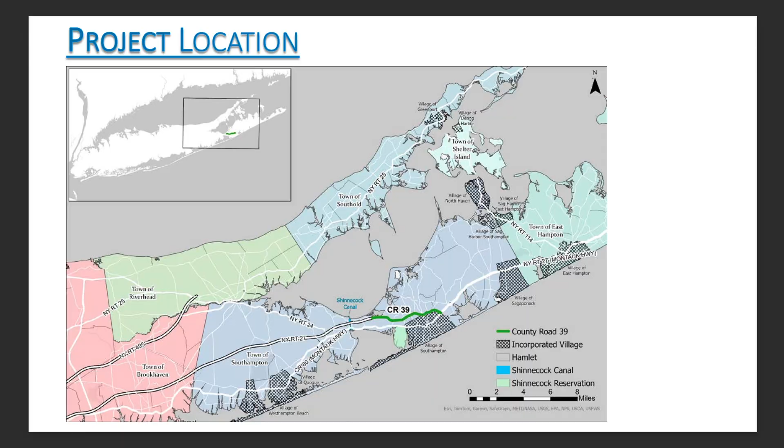So, project location, I'm sure everybody knows where County Road 39 is, just a blow up of that. Project goals, improve capacity, that's a shocker. The biggest one I think on this list is reduce congestion in downtowns. I'm sure everyone here can agree that they would like their downtowns back. And if you could eliminate congestion in the downtowns, make them more walkable, that would be a good thing. So I think that's the biggest one to take away from this. We'd love to improve the congestion in the downtowns, not just on County Road 39.

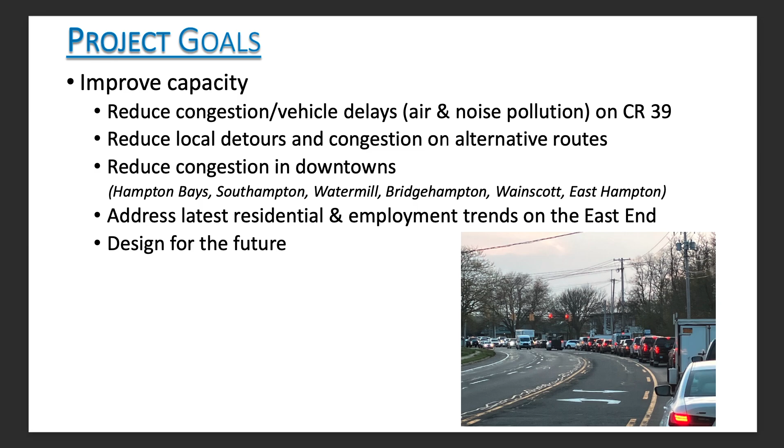Obviously, safety is a huge component, making the road standard lane widths and shoulders. That would help emergency services. Obviously, the delays impact emergency services. So a little background, and I think this is all kind of obvious stuff. We're in the very beginning stages of a planning project. So we're here to advise of some of the congestion issues, some of the magnitude of the congestion, some of the ideas that we have, but we're also here to listen. We would like your input. The more input we get from the community, the better we can tailor the project to meet the goals of the community.

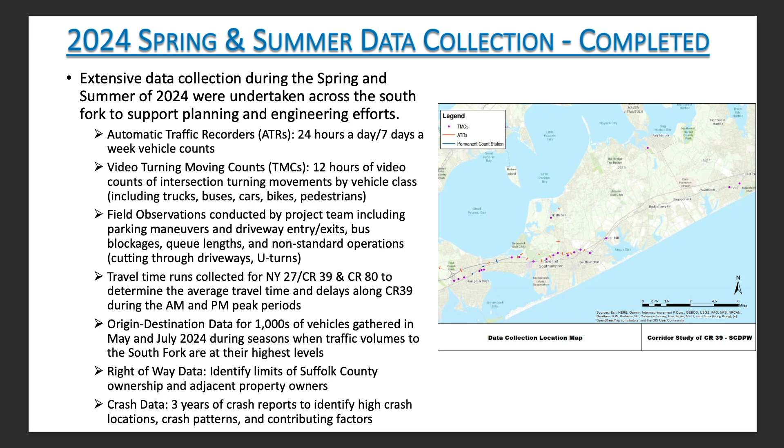Origin destination is essentially figuring out where people are going once they cross the canal. There are only 2 points to cross—Montauk Highway and Sunrise Highway—so it's perfect, textbook traffic engineering. You collect data on who's crossing the canal and where they're going, and with technology now, through Google and Google Waze, that kind of data is available to us, and it's really fantastic.

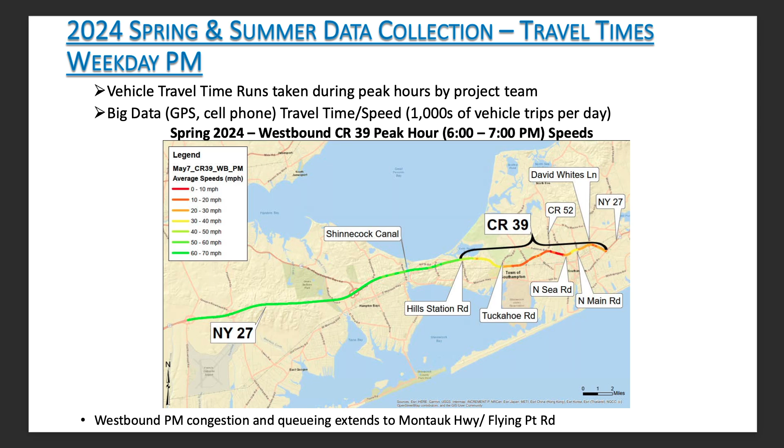In the PM it's reversed—operator error, hang on. So on County Road 39 in the PM, you have all red, and then it opens up and goes out onto Sunrise Highway.

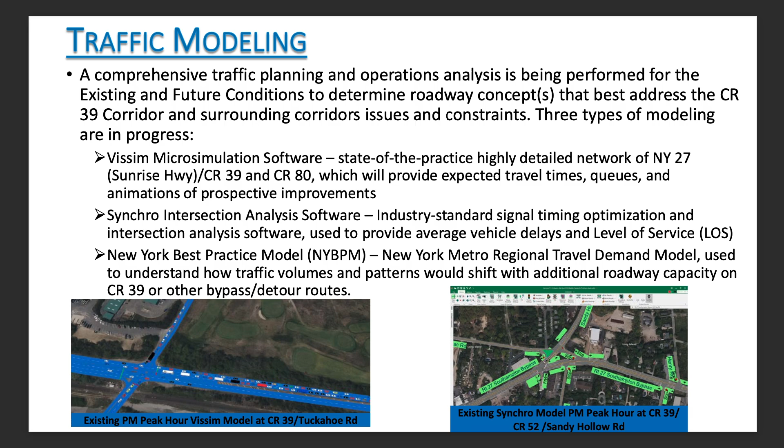First, what we do is correlate the models to existing conditions. Once the model actually looks like the existing conditions—so if there's a queue from an intersection that's 150 feet from the signal, and the model represents that same 150-foot queue—we know we got it right. So we make sure the existing condition model is correct.

And then we take it and put the proposed data in. What if we did this? What if we added a lane? What if we put a roundabout there? What if we put a bridge there? Now that we have the model correlated properly, that model can tell us what the future might look like, what the alternatives might look like.

So travel times—we've done travel time studies in 2015, 2016, and 2022. These were all conducted when the flashing operations occurred, and it was extremely interesting, which was a shock to us. Every time we got the same result: travel times increased when the traffic signals went on flash. No one believes us, but we did it three times and got the same exact result.

The first time it was interesting to us, and then we kind of realized that the cones and the flashing lights distracted people. That's what we're surmising. In the mornings particularly, there's not a lot of green time on the side streets—you've got mostly green on County Road 39—and the cones were actually distracting people, causing them to slow down.

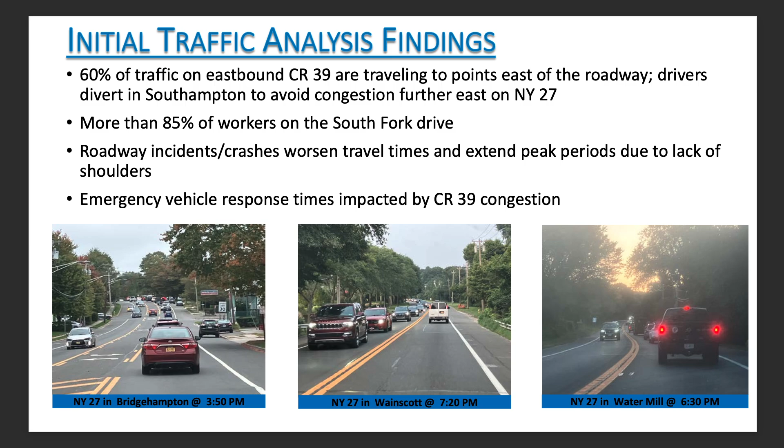Crashes worsen everything. Every time there's a crash, I don't have to tell you, it makes everything horrible. You get a crash and can't move anywhere. Obviously, emergency service is affected.

In 1984, New York State DOT did a South Fork transportation study. In 1986, the East End Transportation Council came into being, and they did a sustainable East End development called SEED. In 1999, Southampton Town did another comprehensive plan. In 2000, a transportation advisory task force was created. In 2001, there was a Southampton intermodal transportation study. In 2005, a presentation was given to the Regional Transportation Summit. In 2009, there was a follow-up on public transportation.

So from 1969, when the problem was identified, to 2008, they studied it. Nothing was done. In 2008, Suffolk County widened - we had our first widening project, and then in 2013, we had our second widening project. So in 2024, here we stand. What are we going to do? We're going to study it. We're going to fix it.

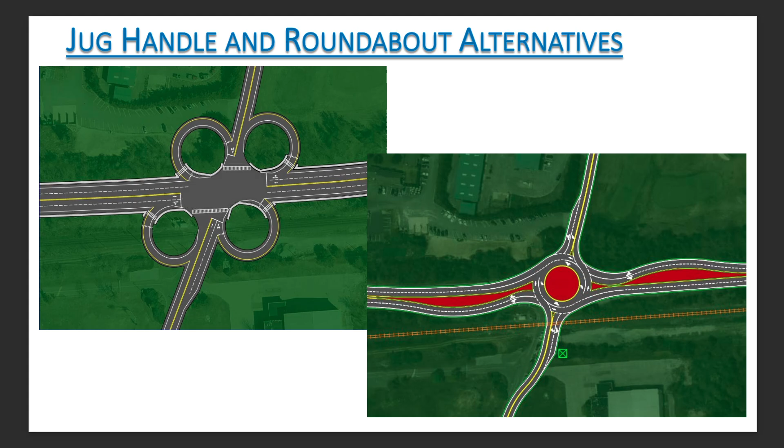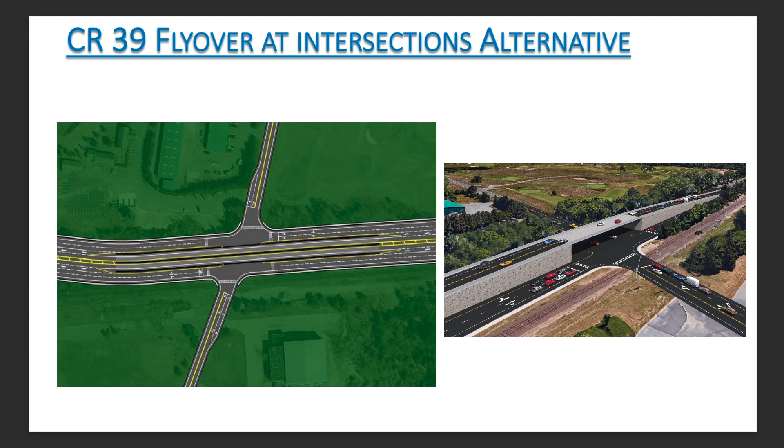So again, jug handles, roundabouts with 3 lanes, these kind of solutions, really not gonna work. Flyovers, side street flyovers, that's what this is, a side street flyover. This could be part of the solution, but it's not gonna be on its own a solution. Again, a different type of flyover on County Road 39. So here's County Road 39 flying over this intersection, so there would be a bridge. This is a rendering of that.

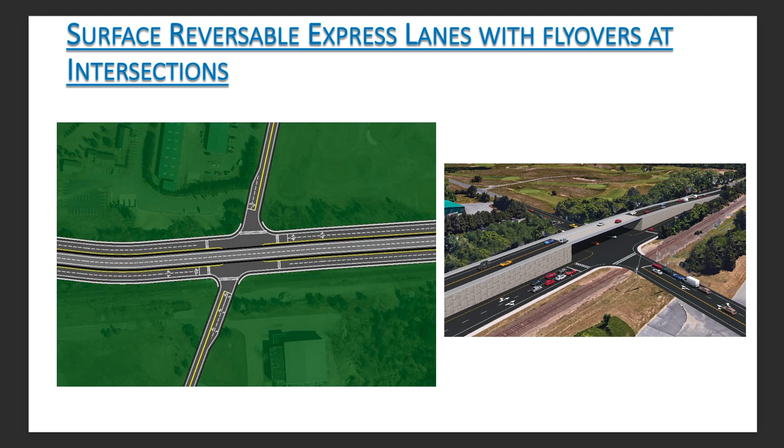So we have reversible lanes. The previous one was an express lane, essentially. This would become some sort of express lane. Now this is a concept where it's reversible. So you would make this eastbound in the AM and westbound in the PM. But again, you have a flyover. I agree with the position that it doesn't fit with the character of the community. There's no bridges like that on the South Fork. 100% agree. But it still doesn't discount the fact that you need this. It's the only thing that's going to help you.

So, love this one. My commissioner loves this one. Elevated express lane. So if we were to widen County Road 39, we're going to have to do massive property acquisitions and change the character of the community in a big way. Probably put some businesses out of business because they'd be too close to the new roadway. So there would be huge changes there.

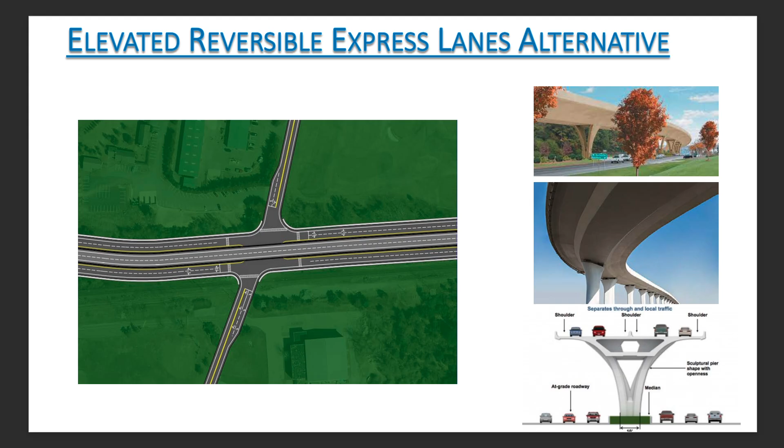This would lessen that. So if you essentially ran an elevated roadway down the center, you could lessen the property acquisition, lessen the impact to those businesses. Now I'm not envisioning 4 lanes. We just pulled this off the internet to give you an idea of what we're talking about. It would probably be something smaller than that. And that is definitely not in the character of the community. But it's a solution that would work. And it's hundreds and hundreds of millions of dollars.

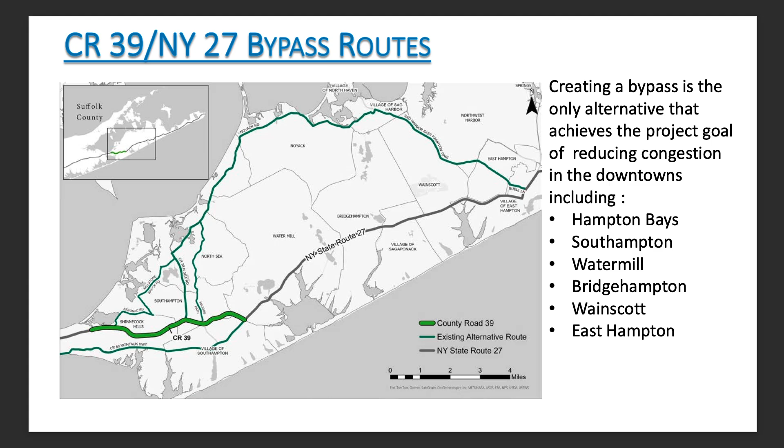Bypass routes. So, we have a lot of downtowns that are affected right now. Hampton Bays, Southampton, Watermill, Bridgehampton, Wainscott, East Hampton. I'm sure you guys could even name more. You have one roadway, and it runs right through those downtowns. The only way to get those downtowns back is to do a bypass road of some sort, somewhere.

Where that is, again, we need input from the community. We need the community to come to a consensus. You're not going to agree 100% where it should be. We don't expect that. But we need to get some sort of consensus on where that alternative route may be best placed. And then we can maybe build it. So here's some ideas.

There's existing alternative routes right now, which is Shrubland to Noyack, okay? Maybe that is improved. Maybe there's some other roadway that is constructed in the center of this fork, okay? There's what is that, magenta? No, that's not magenta. What color is that? Teal, that's the color, thank you.

So 39 to 52, and then there's a LIPA right-of-way that we might be able to take advantage of. And then you have the Long Island Railroad right-of-way, which is the purple. So, there are options for alternative roadways. However, we need to get to those start points. Say the LIPA right-of-way is the one that's selected. We have to get to this point of the LIPA right-of-way. So we have to improve County Road 39 and 52 potentially to get to that point. And then there'd be an alternative road.

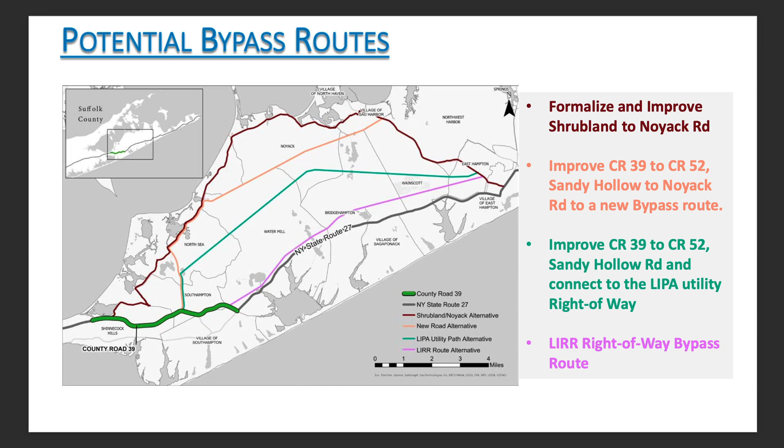So that's kind of the thoughts there. So what are we going to do with this opportunity? In 1975, again, the Sunrise Highway was canceled. In 1984, we had the South Fork Transportation Study. It concluded that no consensus could be built. 1996 to 2005, there were multiple other studies. 2008 and 2011, widened County Road 39. In 2024, here we are.

This will be a regionally significant, transformative project. And everyone needs to think of it in those terms. It's going to transform the South Fork because the conditions that you're in right now require it. Okay? We don't want to do it. We're not doing it just because we feel like building a huge project. The conditions require this type of improvement.

The do-nothing alternative, quite honestly, is probably where I think we're going to end up. I hope we don't, but I've been doing this 20 years. I've been talking to this community for 20 years, and I don't know that everyone can galvanize and come together. That's why I'm being so blunt, and I'm encouraging you to do so, because it's the only way to fix this. But the do-nothing alternative, it's a real thing, and live with the congestion.